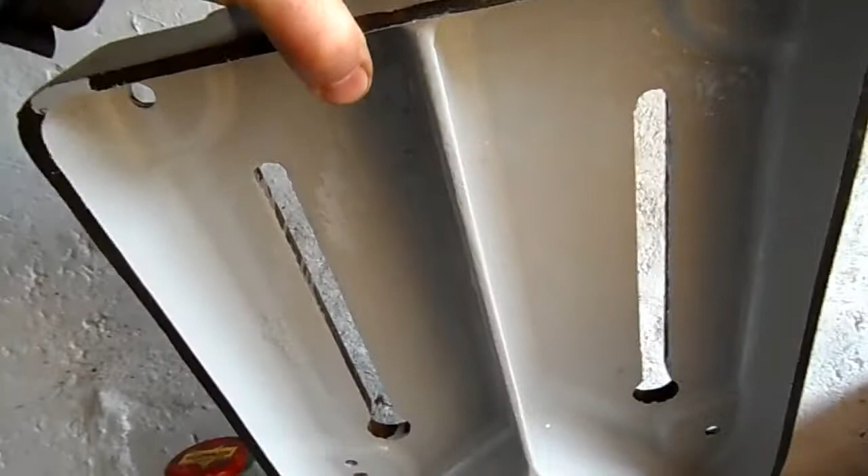So I've still got to paint the base. The rest of the parts have been done. And when I say I've still got to paint the base, I have actually done the underside as well already. I did that first.

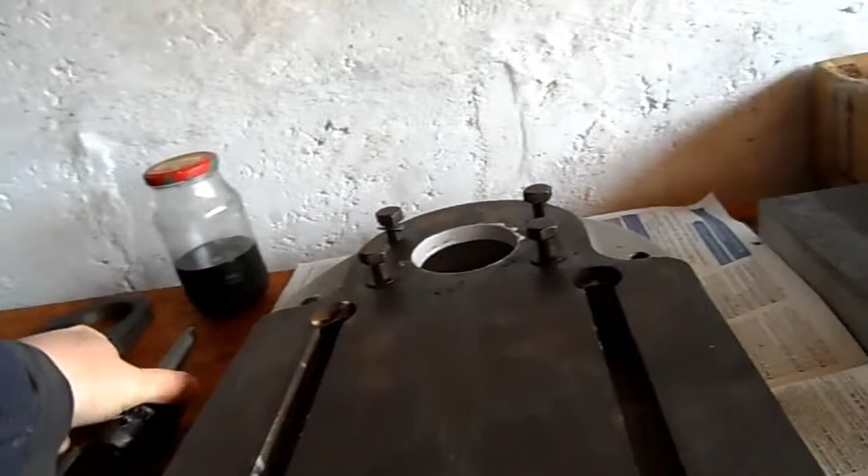The other thing I've done is I've gotten the... right, oh lovely, aye. Too good for work, anyway.

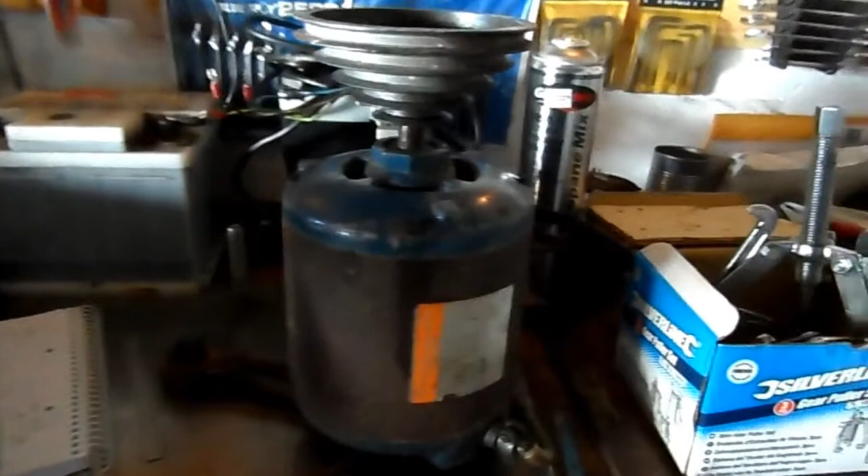So I got this chuck here cleaned up. Now in the last video the teeth weren't very clear, and as you can see here I've got them clean now, and you can see that they're just all buggered, you know. I'm going to go and look for a new chuck, because this one's really past its best. So I'll keep it as a spare, as a backup.

Not done anything to the drill itself. That's been just sort of sitting there really, to be honest with you. I have made a start on the motor though, and I'll just show you that in a second, if you give me a moment.

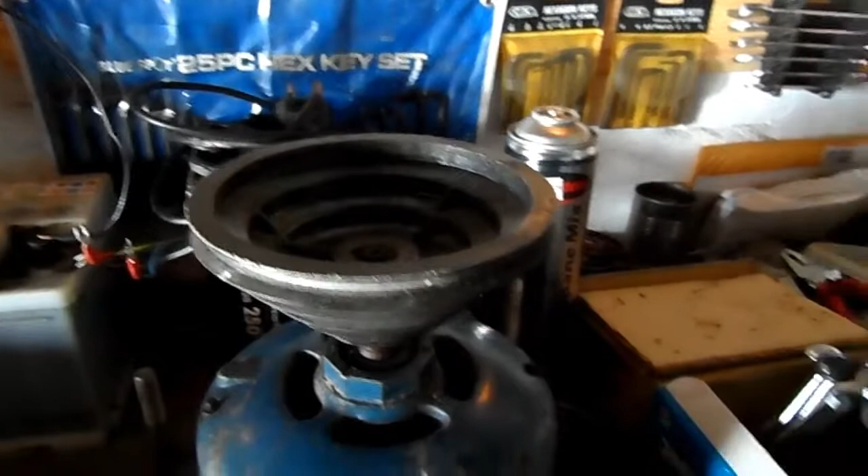Right, okay, this is the motor, right? What can I say? It's a fucking electric motor with a pulley on the end of the shaft, right? I don't want to belabor the point here. I like fixing up stuff, I like restoring stuff, I like making sure it's all going to work and be reliable for my own use.

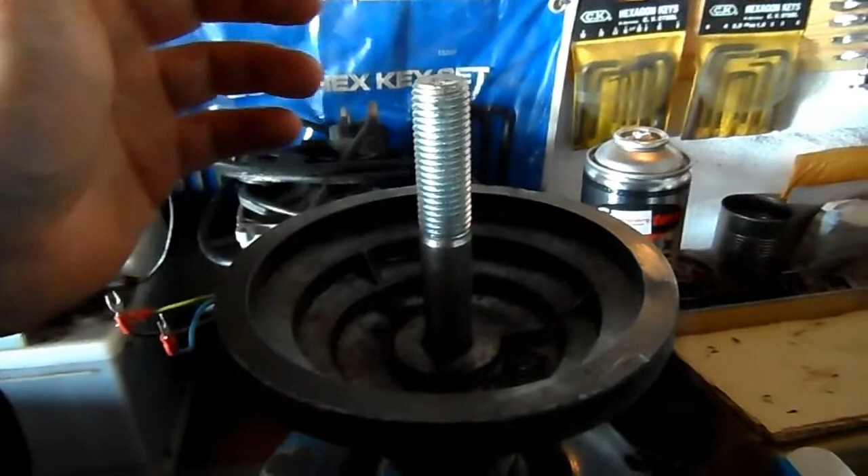I'd get bored if I was restoring motors all day long, 7 days a week or 5 days a week. I like to do new things, take on new challenges and be constantly learning something new. That being said, I do like tinkering with motors and engines and, you know, the usual sort of stuff, eh lads? You know what I'm talking about.

Now, I came up here last night to take this pulley off. I was a little bit concerned about it because these things are quite brittle. I've got a cheap set of pullers here which do fit, but they only just fit on the outer pulley. But of course, because the pulley's recessed, I didn't have the travel on the shaft here off the pulley to put any pressure on the shaft of the motor. So I just used a small spacer to put some pressure on there.

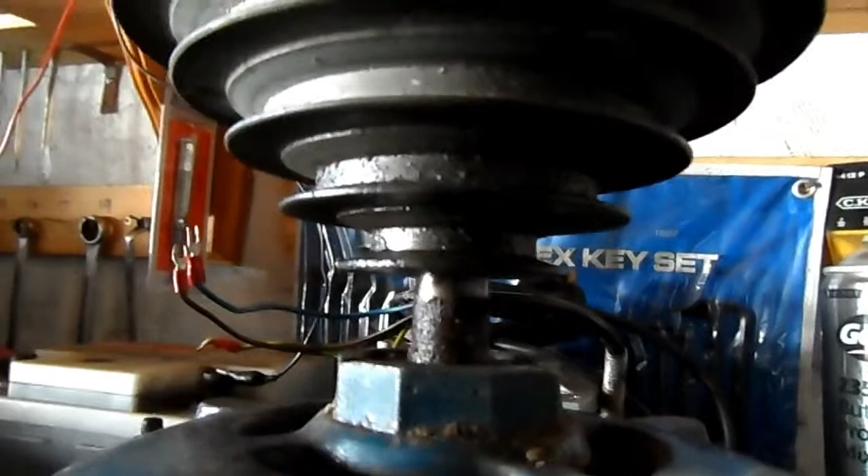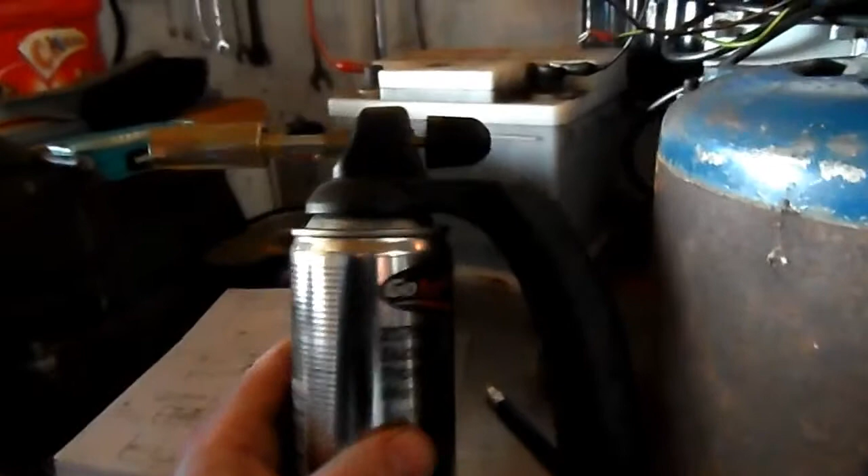Before I started to put any pressure on the motor, I'd kind of given the shaft a slight scrape with just this sharpened up hacksaw blade to get the worst of the rust off. And initially I put it hand tight, just to get a bit of pressure on it and get it all adjusted so there's an even torque, I guess, on all three lifting points, and make sure that the spacer was in line with the shaft of the pulley, just getting it all adjusted.

Now I try to be methodical and I try to be accurate and I try to keep my workplace clean, and that's a constant struggle. And last night I made a slight mistake. It's not a big deal, nothing's broken, nothing's damaged. But I failed to clean the entire... sorry, pointing in the wrong place there. The entire length of the shaft that was protruding from the top of the pulley.

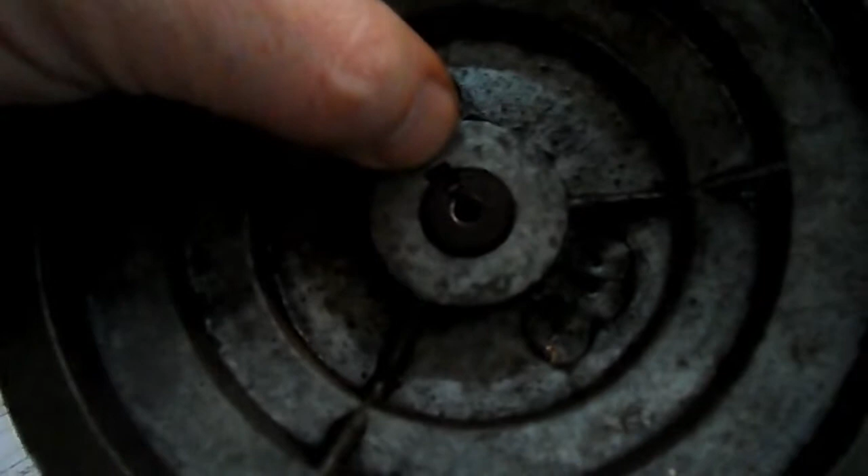Now, as you can see here, I've got what, maybe a quarter of an inch movement there. And the pulley went pretty tight on me, or sorry, the pullers were quite tight getting, and I wasn't getting any movement.

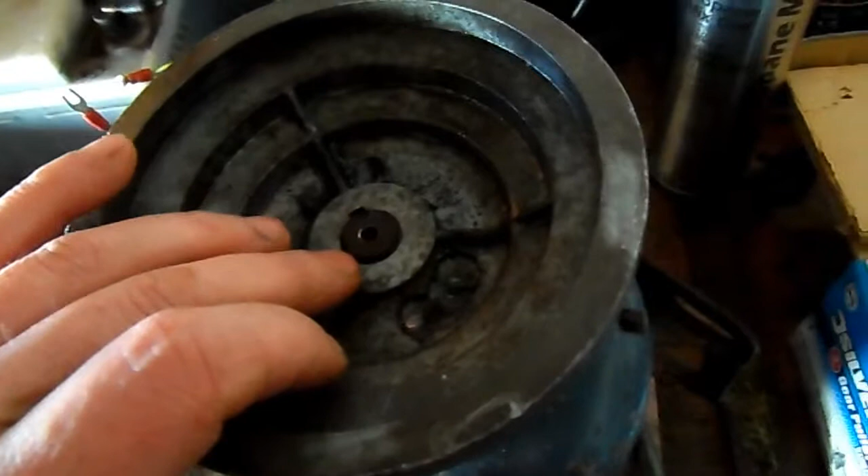So I used a small gas torch, one of these little propane things. They don't give a lot of heat, but in a lot of cases you get enough out of it to help. So I put some heat on it, and then I got a bit of movement, and she was coming quite nicely there. As I was tightening up the shaft on the pullers, she was slowly creeping upwards.

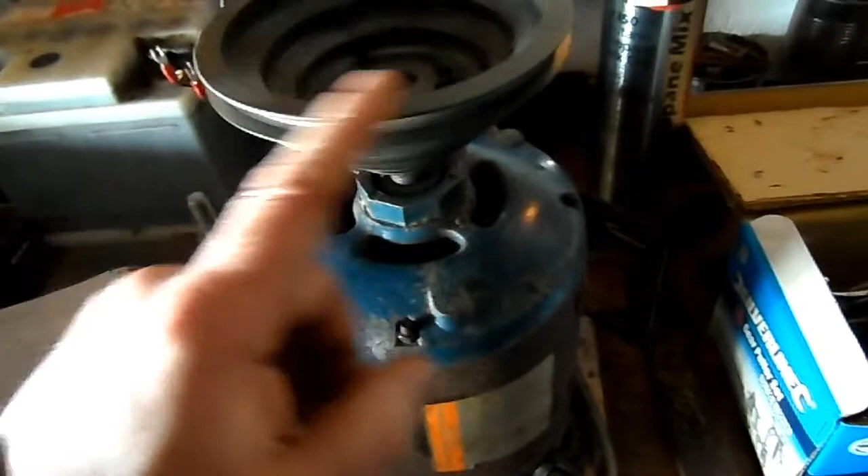Now it is a keyed shaft. I'm hoping it's not a wedge, but I don't think it is. When I spray around here, the water seems to drain down through a gap between the edge of the pulley here and the top of the key. So I don't think it's a wedged key that's in there.

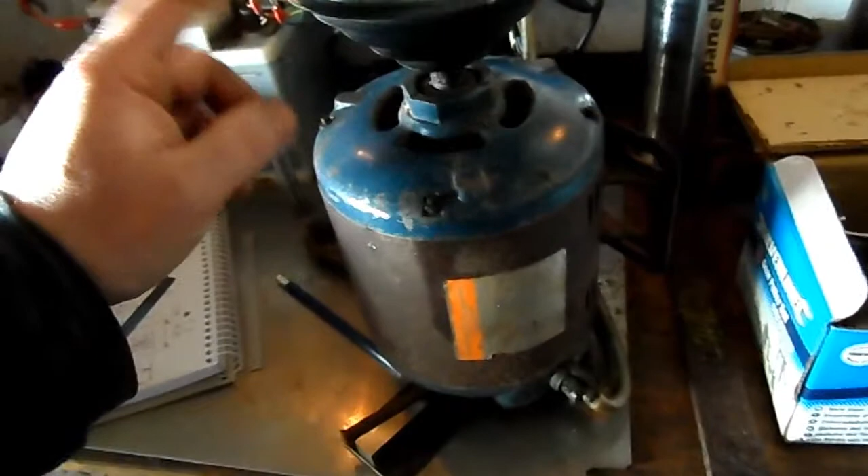Now, she came up quite nicely to this point, and then she started getting really tight. I never cleaned all the way up to the top or the end of the shaft here, so I'm thinking it's just the dirt and corrosion starting to wedge and causing interference between the shaft and the pulley. So I'm just going to have to tap this back down, clean it up properly, and try it again.

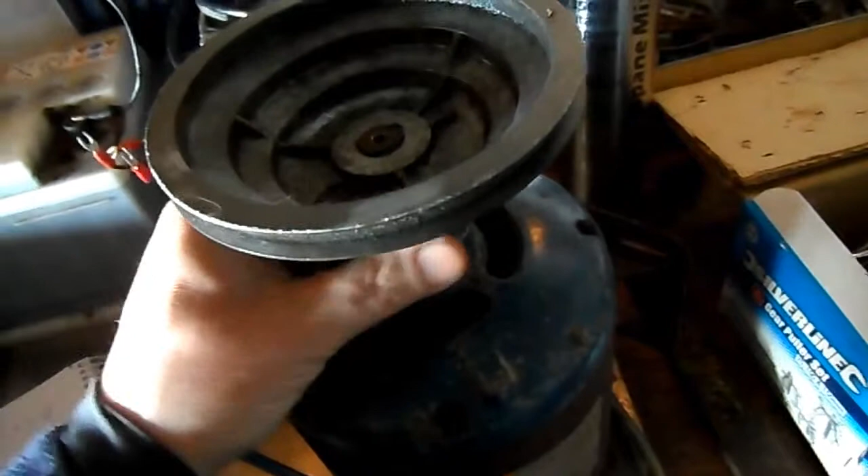So that's where I am with that. Little things, I guess, that take your time, eh? You've got to be careful, because if I break that, I won't get a replacement easily. I'd probably have to buy it new, and that would be, I don't know, 30 quid maybe, 40 quid. You want to be cheap. Mine's fucking cheap these days.

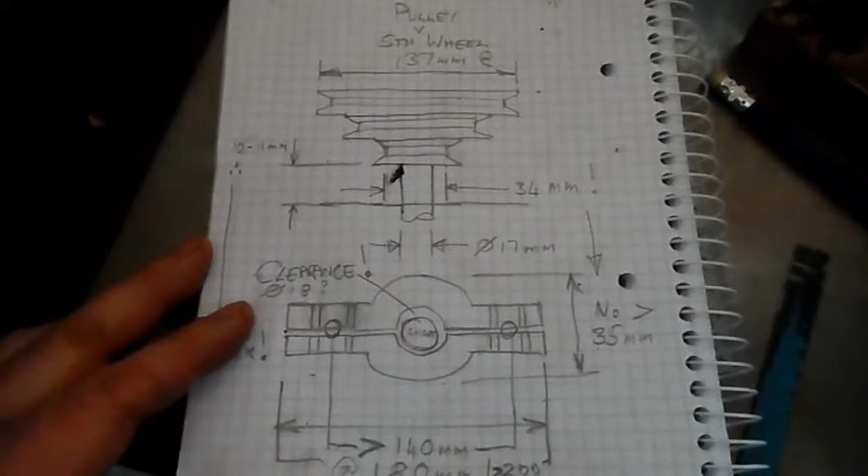Of course I could make one, but there's a lot more work in that than you'd imagine. That's a cast part. These guys are just throwing them onto machines and pushing a button, and the CNC cutters come in and spit these things out, one every 5 minutes maybe. To make that by hand is hours of work, unless you're doing it all day and can get into a rhythm.

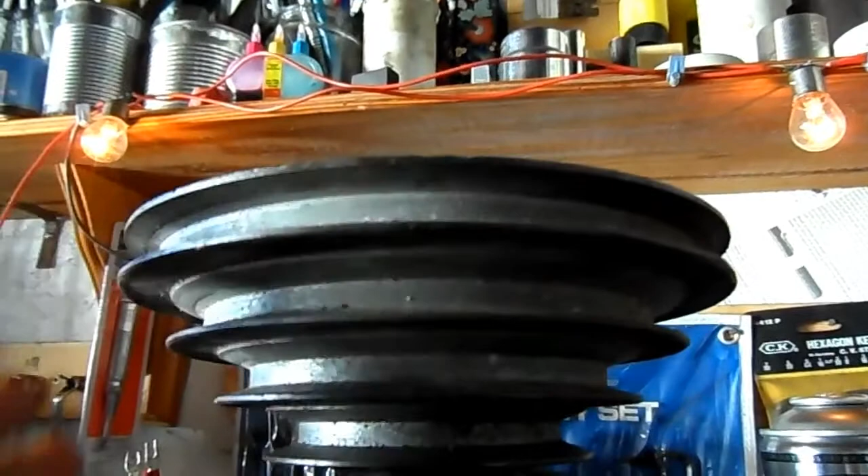So what I'm wanting to do here is replace the bearings on these motors, because there was a tight spot in it. It's not bad, the motor seems to run okay, but every so often she seems to get a bit there maybe, I don't know. Anyway, I want to inspect the bearings anyway before I put everything back together, and it's all going to get stripped and painted and cleaned anyway, so I may as well inspect the bearings while I'm at it.

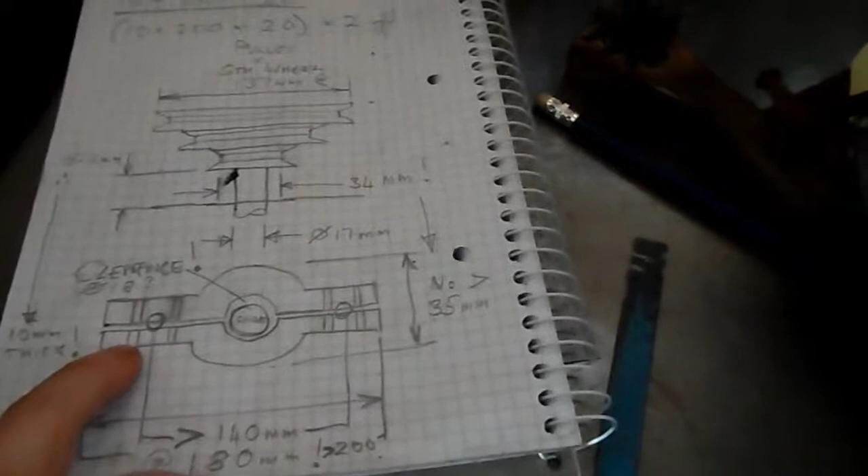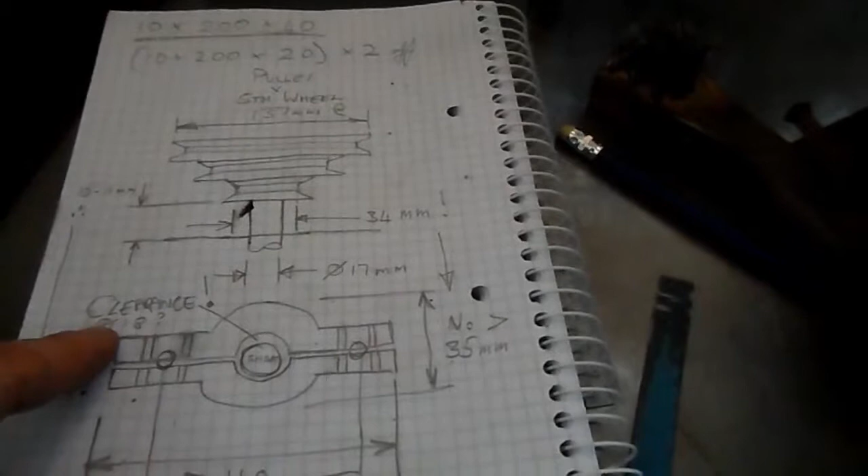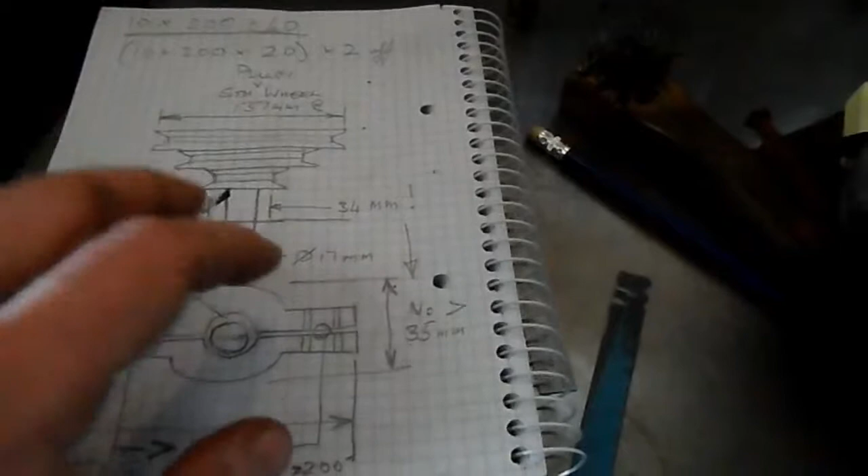So what next? Oh yeah, I did a slight little design here. I was thinking about making a puller that would bear on this underside surface. There'd be a lot less risk of doing damage to the pulley that way. I was wanting it like a sort of collar arrangement to clamp tight, but not bear on the shaft, and then have a sort of jacking screw in the middle, coming up from the middle here with a bar, and then a couple of bars connecting it to the clamping arrangement down here at the bottom.

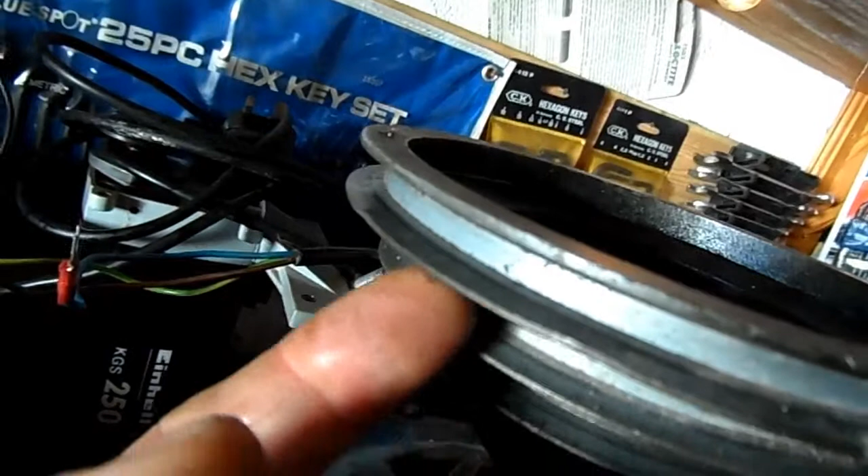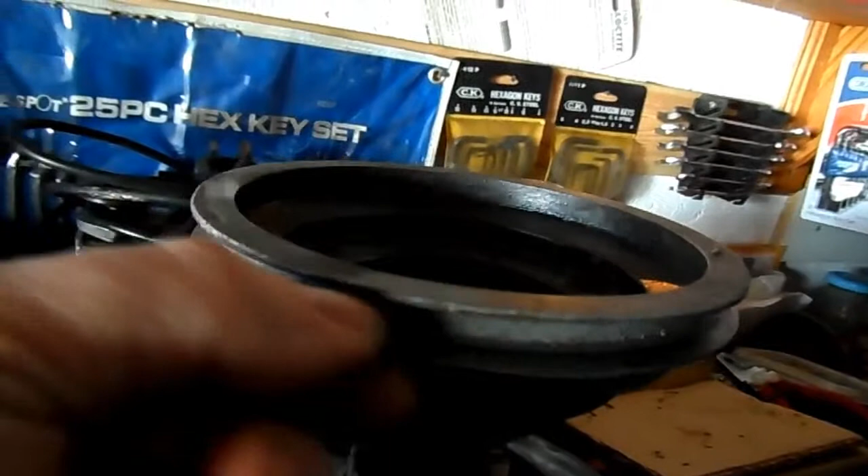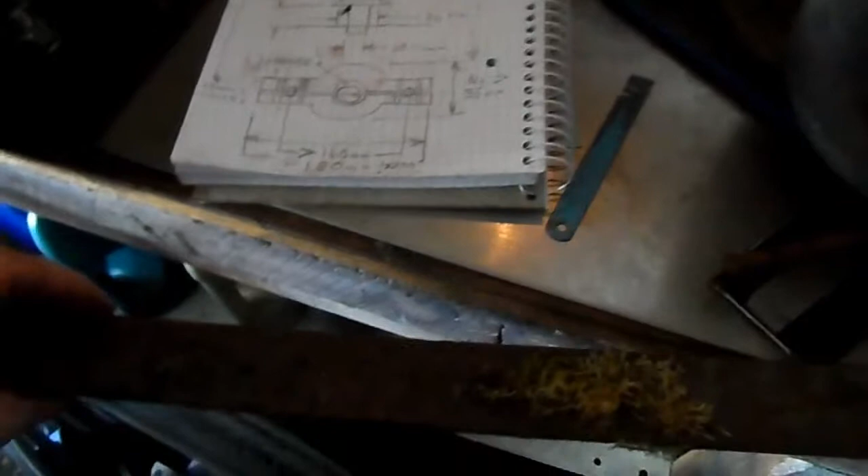So this is where I'd got to, I was just sort of pissing about at it last night. I was going to make it out of a bit of 10mm thick plate, two bits like this bolted together, and then with 2 holes drilled down through the middle. Whether or not I'd tap them or just leave them blank for bolts, I haven't decided. Obviously make this hole in the center here with a clearance. I measured the shaft, the shaft is 17mm, so I was going to give it a mil clearance.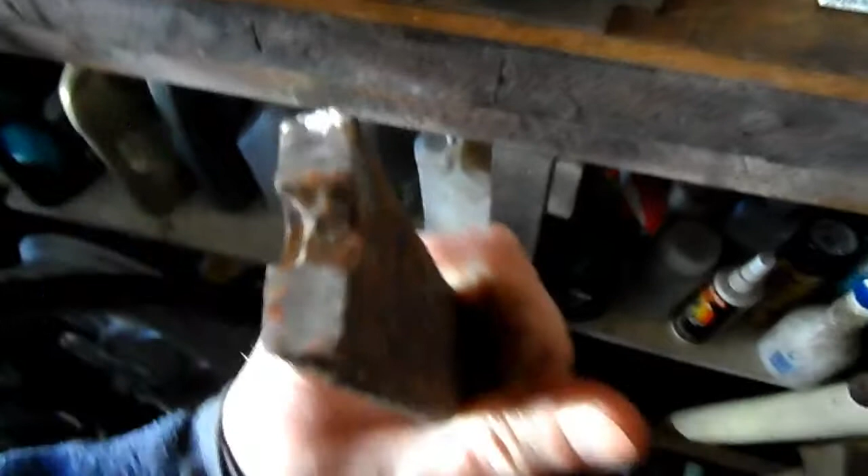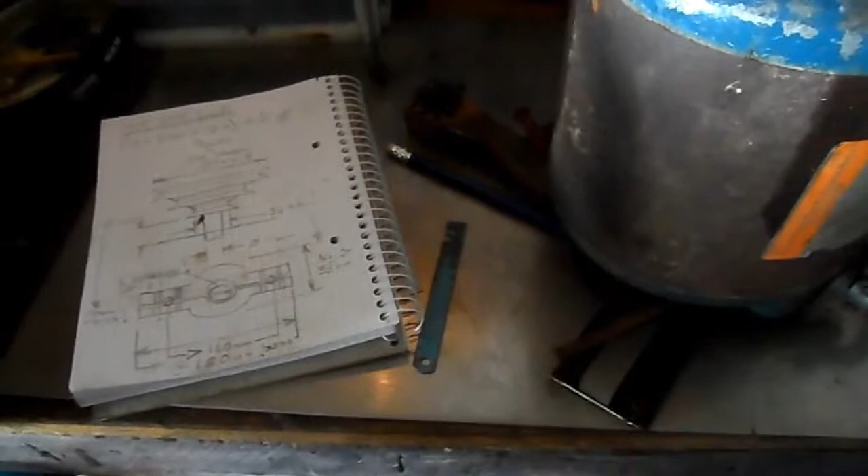Hadn't gotten as far as designing a jack and a plate and the connecting rods, but that was what I was going to try to do, and I think that would be a better solution than what I've got here, because I'm not putting any pressure with this sort of design. I wouldn't be putting any pressure on fragile surfaces like here. It'll take a bit of pressure, but they will crack, and you've got to be careful of that.

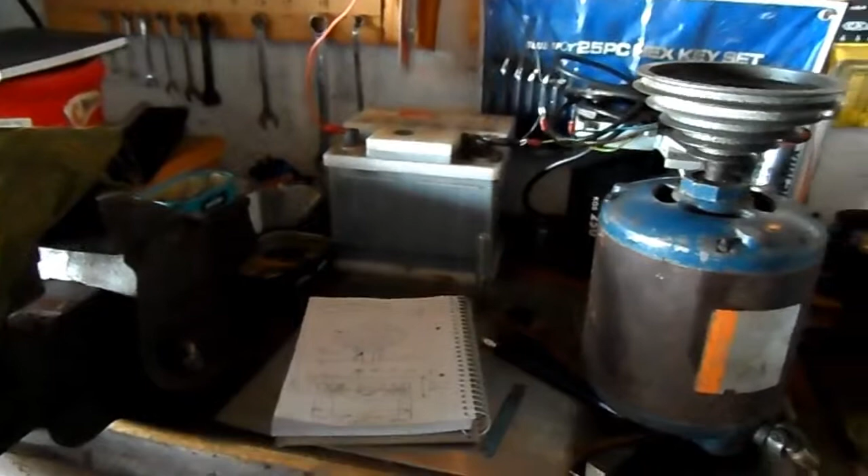So this is what I want to do, but I don't have the material. I was digging around in my scrap bin, and this is the best I could come up with. I know from previous use that I don't know what kind of steel this is made of, but it's quite soft. It bends fairly readily, so it's not really suitable for the purpose, but it's all I've got. Trials and tribulations of Scots Fury.

So yeah, that's 12 minutes already, folks. I'll leave it at that now. I'll give you an update next week, maybe, if I'm feeling like it. Really can't be bothered now, the weather's quite nice and I would rather be out on a motorbike.